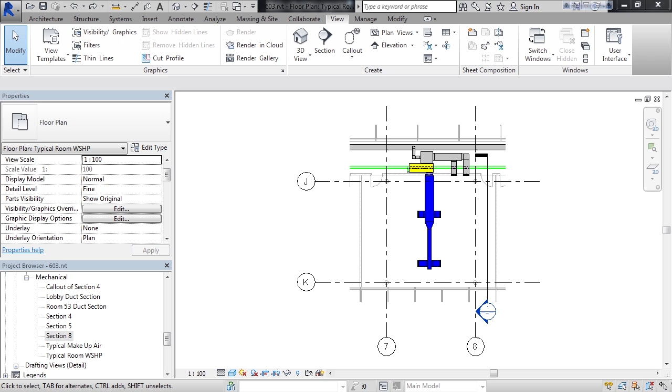For example, I would like to see in detail the HVAC unit and ductwork inside of this space. I can't see it through current elevations, so I'll make a section at a specific point or line and view from that area. So to create this section, let's go to the View tab on your ribbon, and then in the Create area, click Section.

The first thing it wants you to do is pick a point to start to draw your section line. Well, I'll click a point above the actual area to the left of what I want to section, or view. Go ahead and left click and start to drag your mouse. As you do, you see the section symbol, the section line, and the end mark. And then drag this to include everything you want to see within that section. So I'll go below the walls on the bottom and left click again.

Now, after you left click again, you'll actually see a dashed line representing the field of view of what you'll see inside of this section. Well, right now it's viewing a little too much, so I can adjust this by dragging the arrows to pull that depth in and/or the crop to the right or the left to include more or include less.

Now, if you drew the section in the wrong direction, there are two arrows to allow you to flip the section. Clicking on those will flip the section mark itself. If the orientation of the section is not in the correct angle, you can use the rotation icons to rotate the actual section. Note that the section symbol does not have anything in it right now. That text will be filled out when you place the section on a sheet. Once you're done at this point, simply click away from the section and that section mark is created.

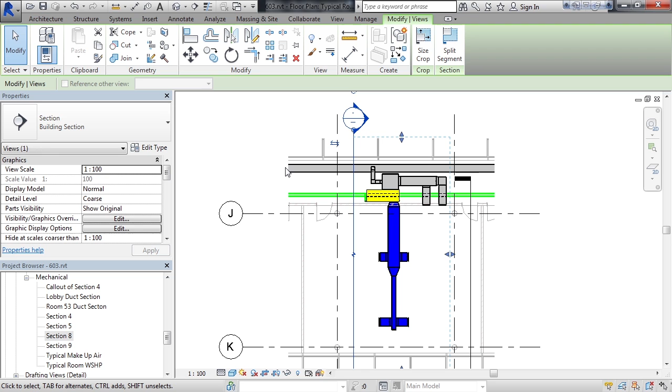To see this information again, simply click the section line. Once you do, you'll see the same symbols highlight, and you'll also see the information in the Properties area on the left. Here you can go in and set the various values and controls for the section, including the clip and changing the section name. So if I scroll down, I see this section has a view name called Section 9. Or I could call it something different.

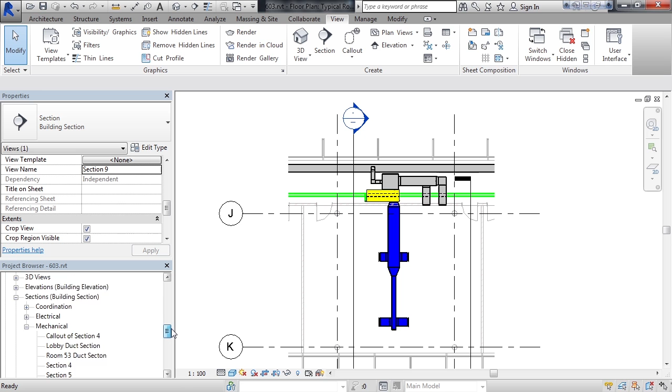So let's go look at Section 9. So in the project browser in the lower left, scroll down to Sections, Mechanical, and then double-click Section 9. This will open up the section in its default orientation and default settings. So right now I see everything, but really I don't want to include the first floor or the third floor. I just really want the second floor section of the HVAC system.

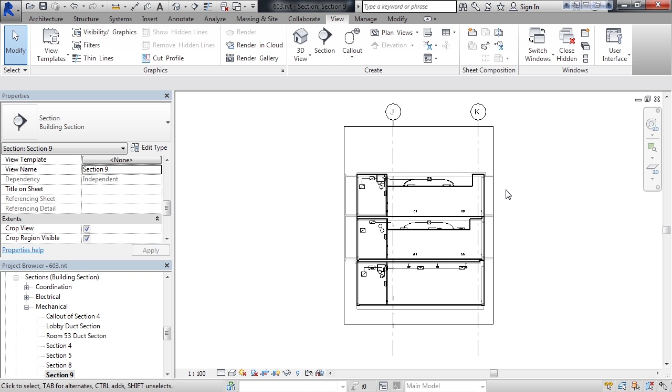So I can adjust the crop. That's the rectangular box around the outside. Simply click on it and then move your mouse over one of the dots and drag the crop box in around the area that you only want to include. Or you could enlarge this if you wanted to include a larger area. Once you're done, simply click away from the crop box to deselect the movement.

To visually turn off the crop box, you can do this in the Properties area on the left. Under Extents, I could uncheck Crop Region Visible and apply that, and that would turn off the actual crop box. I also can change the detail level so I can see more.

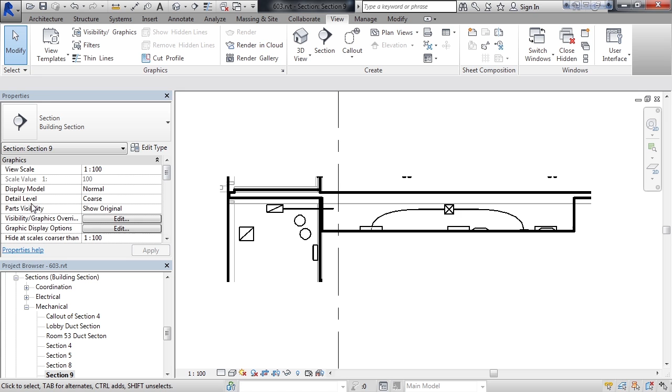So right now I'm just seeing a line for the HVAC ductwork, but really I would like to see its full detail. Well, you could change that setting in the Properties box on the left under Detail Level, or I could also use the icon on the very bottom to change the detail level here. And I'll set the detail level to fine, so I actually see the true size of the ductwork.

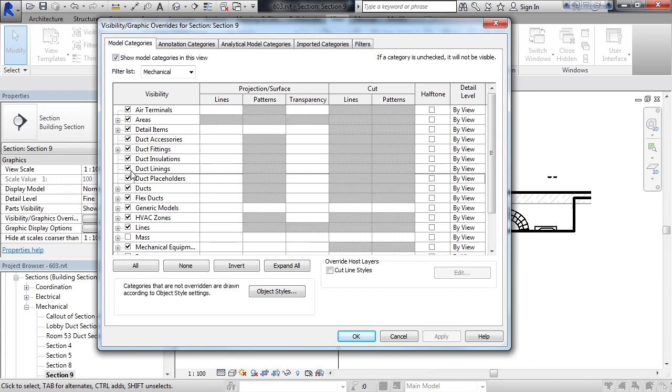Now, other things you could do within the view, you could override the graphics visibility of the elements you currently see within the view. So for example, I have this grid line. Maybe I don't want to see grids. So I could go to the Visibility Graphics Override within the view and click Edit, and then I could find grids under Annotation, and I could turn off my grids just by deselecting. Apply, and OK. And now I no longer see the grid mark within this view.

So as a review, what we looked at in this lesson was creating sections. We first started out with a plan view and created a section mark. With the section mark created, we defined the view range, or what we want to see within that section. Then we went to the actual section view itself. On the section view itself, we modified, again, what we were looking at, the view range, the right, the left, the top, the bottom, by shrinking the crop box. We turned the crop box off, and then we looked at other ways to turn off the visibility of various elements within this view.